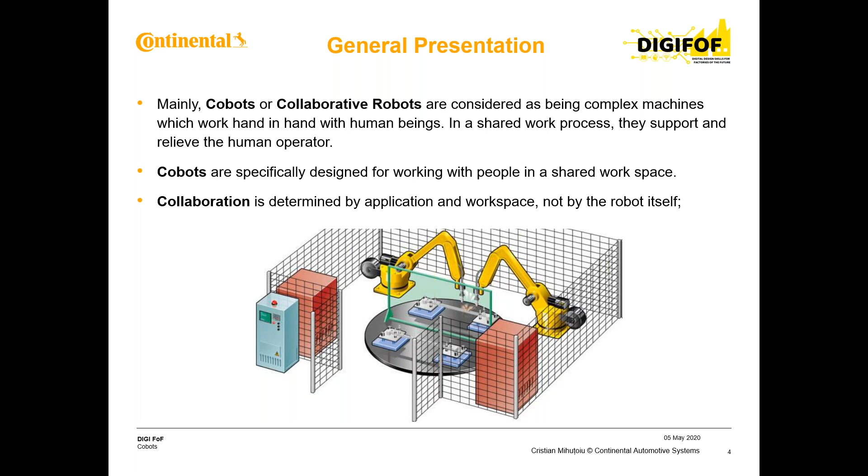Broadly, we have three categories of robots. We have industrial robots, which typically operate in cages because the forces and the dimensions of the material that they manipulate are quite high, quite strong. The robot is a real danger for the operators. That's why we keep the industrial robot in the cage.

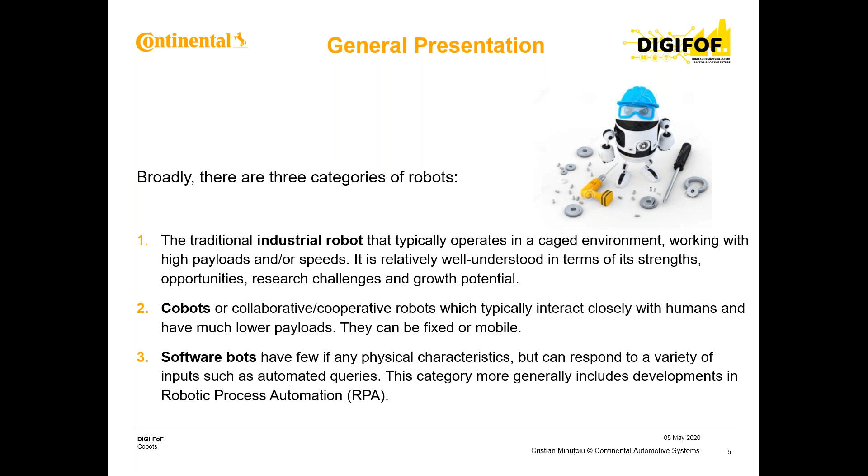Then we have the second category, which is the cobot, or collaborative cooperative robot, which typically interacts closely with humans, with lower payloads, and can be fixed or mobile. And we have the third category, which we do not talk about now, the software bots, applications performing very clearly defined, detailed tasks, like downloading a report from SAP or from ERP systems. We'll not talk today about the software in detail.

When we compare cobots with industrial robots, we identify the strong points of the cobots. The main good point for the cobot is the safety of the interaction. The cobot is designed, built with sensors and the required power, in such a way that the human working with this cobot is not in danger. Another strong point of the cobot is the simplicity of programming.

The programming of a cobot is very intuitive, and sometimes you are able to show the movement. You guide the cobot with your own hand, and the cobot remembers the movement and can duplicate it. So the programming is quite easy. Plug and produce is also a good point for cobots, because you just install it, fix it on the floor, plug it into the power, and then you can start to use it. There are no very strong requirements related to installation.

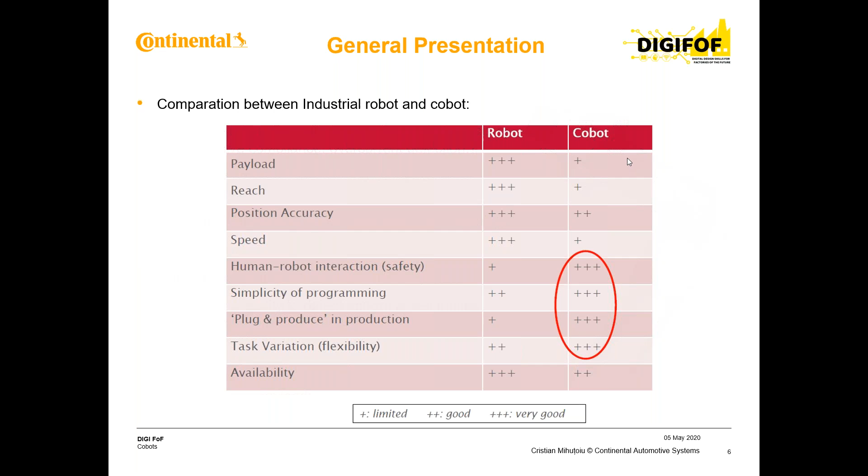The main advantage of cobots, as I said, is safe interaction with humans. This is one of the major advantages of cobots. This advantage comes from integrated sensors, from passive compliance systems built into the cobot, and from overcurrent detection. The cobot is sometimes built with cameras that can identify obstacles and move around them in such a way that it will not cause any harm to the human operator working around it.

Easy programming: as I said previously, it's very easy to make the cobot learn a movement just by guiding the arm with your own hand, and then having the cobot repeat this movement. Flexibility of task is one of the advantages of the cobot. It comes not only from the possibility to change the program, but also from the ease of changing the tool at the end of the robotic arm, which gives the possibility to reuse the robot: take it from one place, move it to a different line, change the tool, and just start to use it.

Here we see some forms of human-robot collaboration, starting with the case where the robot has its own workspace and is put into a cage, so that if you open the door of the cage, the robot is stopped, which is the minimum collaboration, or almost no collaboration. Going through different possibilities to share the workspace, up to complete integration, complete collaboration, where the human and the cobot share the same workspace.

People can give a piece to the cobot or can take the piece from the tool of the cobot. So they are moving in the same space, the same area, and there are enough safety precautions, enough safety elements, that do not allow the cobot to hit, to damage, or to create health problems for the human operator.

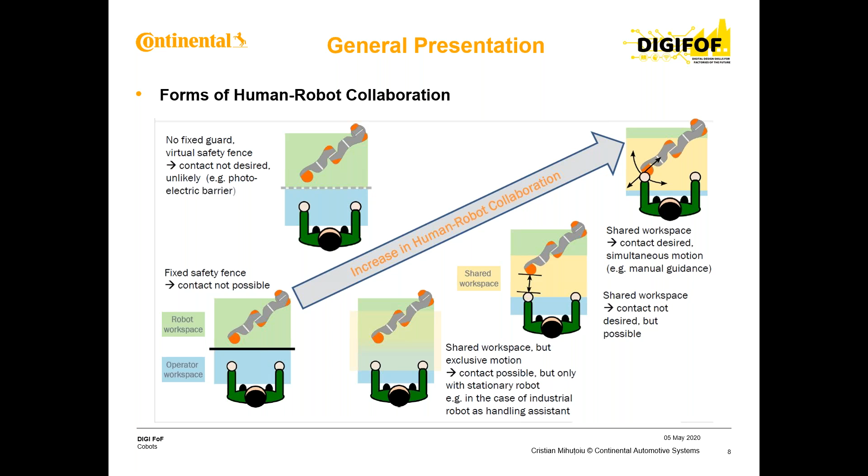In terms of human-robot collaboration, it enables variable automation of tasks for which complete automation is too expensive or too complex. In this way, we can do partial automation using the cobot and leave the other part to the human operator. So in the end, the cost will be more affordable for the company instead of doing a complete, expensive and complex automation.

There is rationalizing tasks by combining strengths, dividing the work optimally between the robot and the human. The idea is that neither of them waits for the other, wasting time. Non-ergonomic workstations can be improved by cobots. This is a very strong point in terms of implementing the cobot.

We remember that in the industrial environment, there are a lot of posts where the operator must do the same task, pick and place, with very high repeatability. We sometimes have machines in our plant that operate with a cycle time below 30 seconds, even below 20 seconds. So in 1 minute, the operator must manipulate a piece 3 times in the same way. For fatigue, for the impact on the health of the operator, this is very dangerous. So in this case, using a cobot there will improve the productivity of the line and will release the operator from these repetitive tasks.

Common applications. There are several common applications. This list is not complete. Definitely there are possible other applications, but there are some of them which are really common.

Pick and place is one of the most frequent applications for the cobots. The cobot just takes the piece from one part, from one end of an equipment, from a conveyor, from a box, and puts it in a different place. You can put it in a fixed position on a device, on a tool, on a second line or a second equipment. Always the cobot picks the piece from the same place and places it in the same position. So the positions of picking and placing are quite fixed and standard.

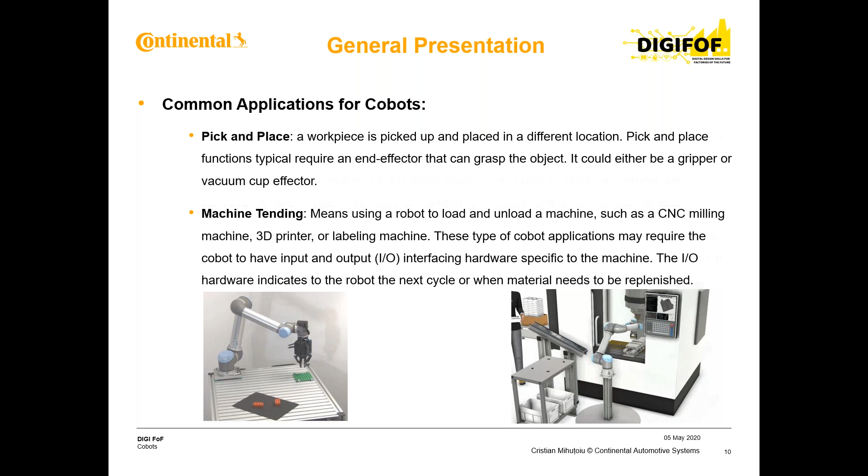Machine tending. Here we talk about the cobot loading and unloading a machine, or an application. It's loading a CNC milling machine, loading a 3D printer, or something like this. This type of cobot application may require an input-output interfacing hardware with the specific machine. So when the machine delivers the part in the specified position, it's calling the cobot to take the piece or to supply the piece for it. This way the machine, the CNC, calls the cobot when it's needed.

Another application is packaging and palletizing. It's a specific application of pick and place. And why is this specific? Because if you remember, when you put boxes on a pallet, usually there are more positions there. So the cobot must iterate the position. If we have 5 boxes to be placed on the pallet, he must put the 5 in the same layout as is in the programming. So he must put the first box, then the second box near the first, the third box near the second one. So in this case, he needs to iterate.

It's the same on packaging. When you have, like, a box with beer bottles, you need to put row by row of beers into the box in such a way that the cobot does not try to put bottles on the same row already filled with bottles and create accidents.

Another common application, we can see it frequently in the automotive industry, is the process task. When the cobot has at the end, as an effector, a hose to deliver some glue or to deliver some silicone, or, if you remember from the automotive industry, robots or cobots using welding devices at the end of the robotic arm. So they just need to follow a specific track, a specific trajectory, with the end effector in such a way to perform that task, to deliver a specific quantity of glue or silicone, or to allow the parts to be welded together. In this case, we have this process task.

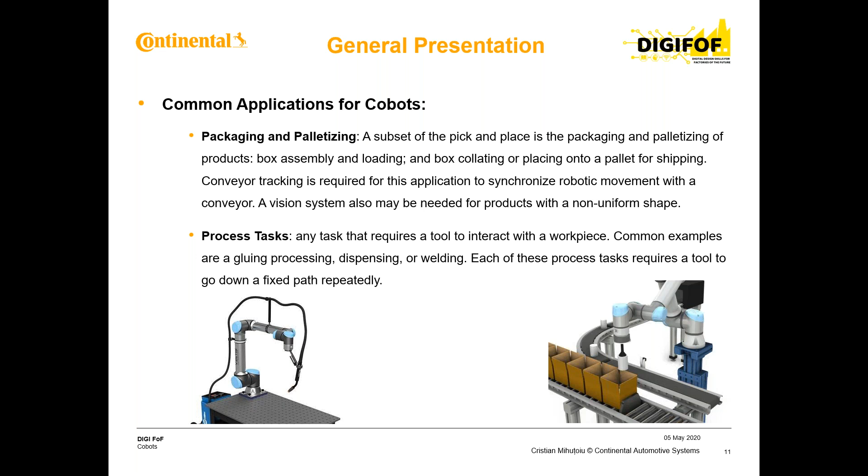Another application that we see sometimes is the finishing task. The cobot uses a brush and he needs to put some pressure in order to clean or to polish some surfaces, to eliminate the dust or to improve the shine of the surfaces. In this case, the cobot needs to be supplied with force sensing, or he needs some cameras in order to identify which are the areas where he needs to do this movement of polishing, or to identify areas with scratches to remove those scratches by polishing, or things like this.

Another application that we have for cobots is quality inspection. It's one not so frequent, where at the end of the robotic arm you put a sensor or a device measuring something or doing some verifications. These end effectors are supplied with high camera resolution, with sensors, all these elements in order for the cobot to be able to do the inspection. The cobot moves the camera around or close to a surface in order to identify scratches, or the cobot moves, let's say, a sensor that can identify if there are holes or defects on a certain surface of a piece or something like this.

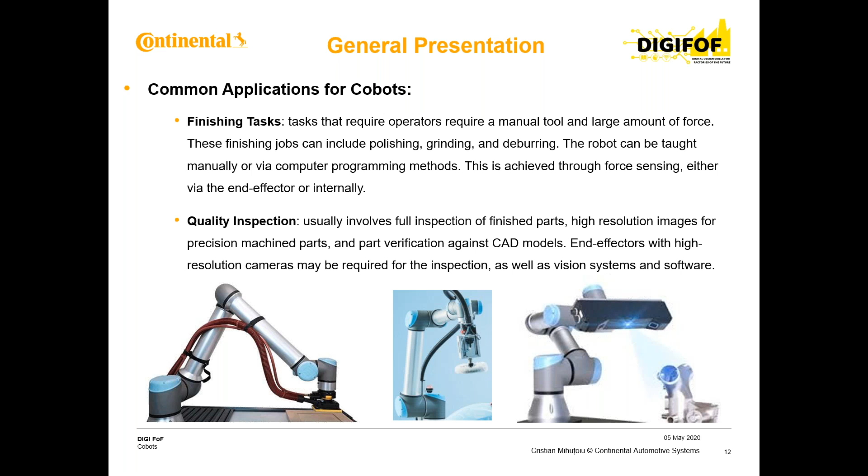Now let's talk about cobot selection. There are some definitions that we need to see before going to the next steps. Payload: here we talk about the weight that the robot can carry, and the real payload is the nominal payload without the payload of the effector or the gripper. So when you plan that the robot needs to manipulate 1 kilogram, you must remember also that the gripper has its own weight, its own mass. So altogether, these two, the gripper and the load, must be within the nominal admitted mass or restriction of the cobot.

Reach is the distance that the robot can achieve. Usually the cobot does not need to be forced to the maximum of the reach, because in this case there are some risks that are introduced. This measurement is taken from the robot base until the maximum distance that the effector can reach.

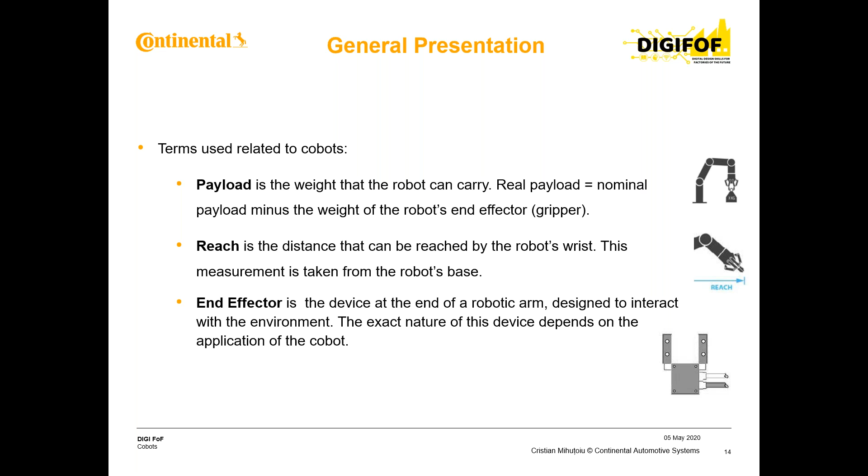The end effector, which usually we call the gripper, is the tool which is mounted at the end of the robotic arm in such a way to allow the cobot to perform the task for which we install it there. The exact nature of the device depends very much on the application where we need to use the cobot, and also depends on the cobot itself.

In terms of Cobot selection, in Continental Sibiu and also in Continental worldwide, Universal Robots is the standard supplier for Cobots. An evaluation of different Cobot suppliers was made at corporate level, and the decision was taken to use Universal Robots as a standard application for our plants.

Degree of freedom is also a very important selection rule. Depending on the complexity of the Cobot movement or other restrictions faced on the shop floor, an increased number of degrees of freedom may be required.

Speed is also very important, because based on the speed the Cobot is able to perform, in a specific cycle time, the movement and the task it must perform. If the speed is not adequate, the Cobot will become a bottleneck for the line, and the productivity and output of the line will decrease. Safety is one of the major elements.

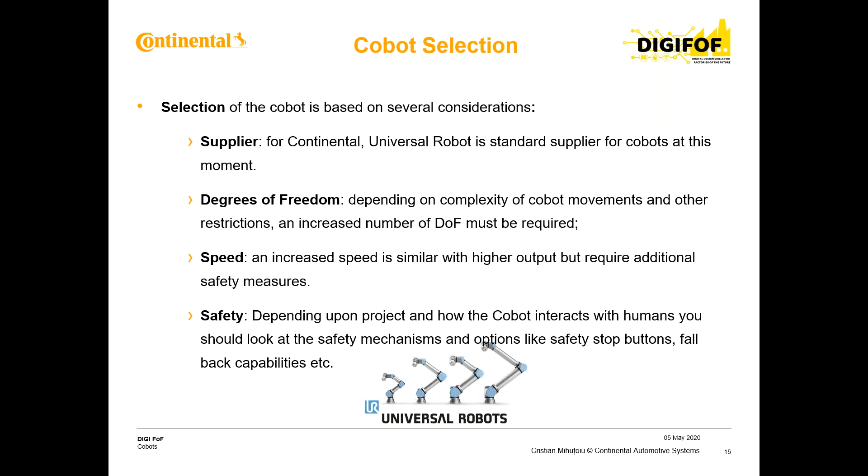There will be no incident in the collaboration between human and Cobot. Here we have a description of a Cobot UR5 from Universal Robots. It's the most frequent Cobot in our CBU plants, because based on all these requirements, we decided to use this Cobot for most of the tasks that we wish to transfer from the human operator to the Cobot.

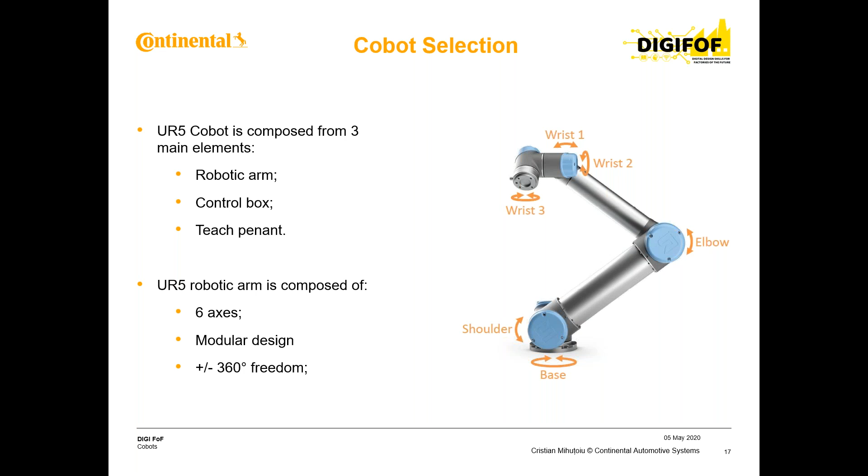Now, let's see what this UR5 Cobot is made of. We have three elements: the robotic arm, control box, and teach pendant. The robotic arm is able to move on 6 axes. It has a modular design, so some elements can be transferred from one to the other, and it has 360 degrees of freedom, so it can perform a complete rotation for all its elbow and wrists.

The control box contains the flash card, the USB with software. The control box also supplies power to the robotic arm and contains the safety systems and all the communication devices. As connectors, we have the power connection. As you can see, the Cobot does not require special power sources. It needs the connection with Ethernet, USB, and also the connection to the robotic arm.

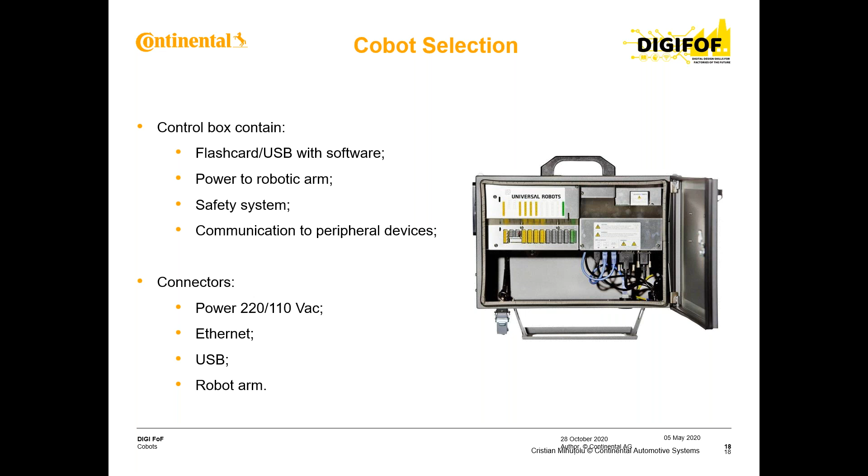The teach pendant, or touchscreen monitor, contains the power button, emergency button, free drive, and USB connector. We'll come later to talk about these elements. By pressing the power button on the front of the panel, the control box will be turned on. When the control box is started, text will appear on the touch screen. After about 1 minute, you will see that the touch screen is activated and you can use it.

We have an emergency button, very important, because pushing it will immediately stop the motion of the robot. All movement will be stopped and all the brakes will be activated. Emergency stop shall not be used as a risk reduction measure; it must be only a secondary protective device. So you cannot use this emergency button as one of the main methods to prevent collision between the human operator and the Cobot.

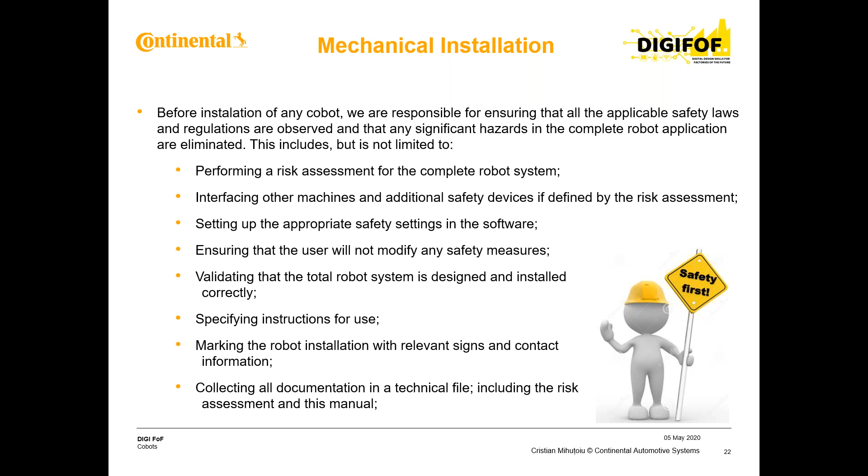The robot must be supplied and marked with all relevant warnings, relevant details, marks or highlights. All the documentation, as I said, must be included in a technical file, including the risk assessment. All this information must be available in the area where the robot is working, otherwise it is useless. If the operator needs to check something, he needs to have this folder, this file available.

When we talk about mechanical installation, there are two areas that need to be taken into consideration. One of them is at the maximum of the reach of the cobot, where even if the cobot makes a movement with a low speed, due to this range, it is able to hit the operator or any other obstacles that it finds in the area, so it can create a risk.

So that's why it matters when the area where the robot must work is longer than 450 millimeters. In the case of this cobot, we talk about the UR5. So when the cobot is going to this distance, 450 millimeters from the base, there is a risk of stretching out or punching the operator, or destroying the obstacles that the cobot will reach.

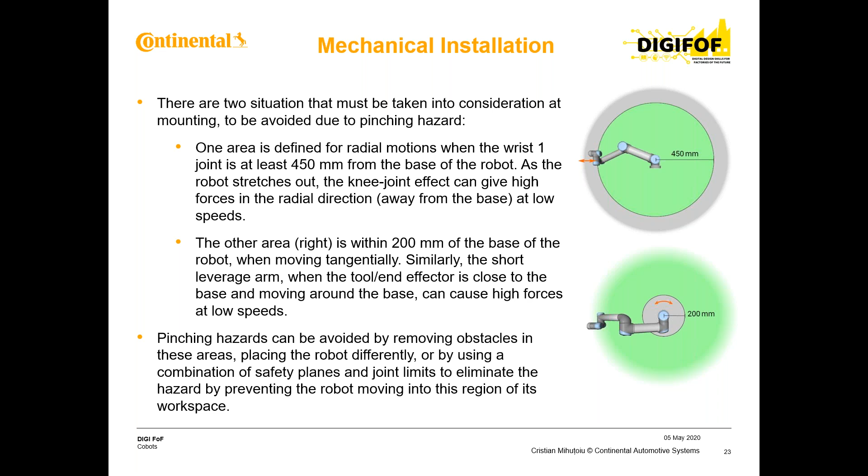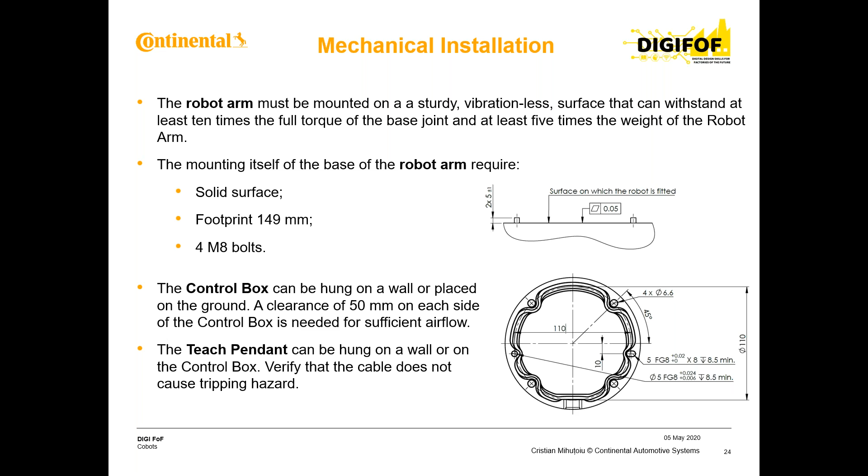We have also some details about how to fix the robot onto the base. The robot can be fixed on the base, on the floor, or can be on a support in order to make it operate at a higher distance from the floor.

There are also some possibilities for some specific applications to dramatically increase the reach of the robot by adding linear axes, vertical and horizontal, that can enhance the radius of action many times. But in this case, as I said, we need to take care about the obstacles. We need to have a more detailed risk analysis in order to avoid obstacles, in order to avoid accidents.

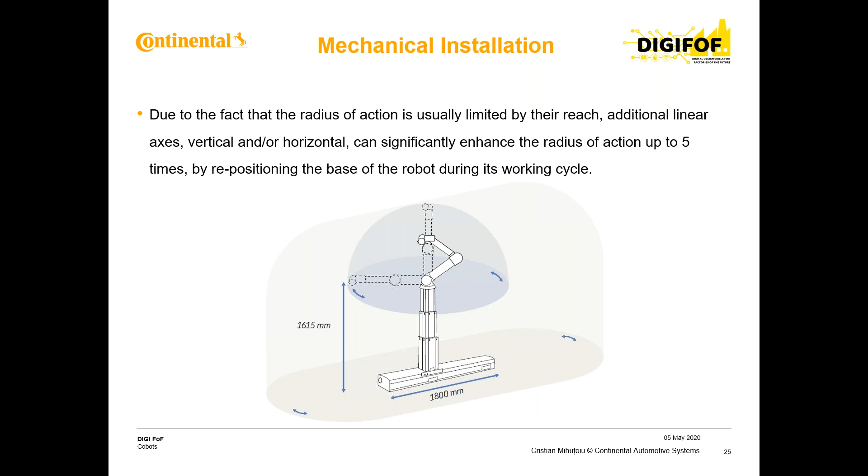In terms of gripper development, there are not too many things to say. The most frequent gripper that we have in our plant, and that I have seen until now, is the gripper with fingers, between 2 to 5 fingers, for pick and place. Because pick and place is one of the most frequent applications, the gripper for pick and place is also the most frequent. We have also suction cups. We don't use them in Continental Sibiu, but they exist and can be used with very good results.

And there are also two grippers, let's say more specific for the application: magnetic, when you need to manipulate some parts made from iron, or electrostatic, when you need to manipulate some, let's say, plastic parts or small parts that can be manipulated using this electrostatic effect. But these two, magnetic and electrostatic, are quite low frequency kinds of grippers.

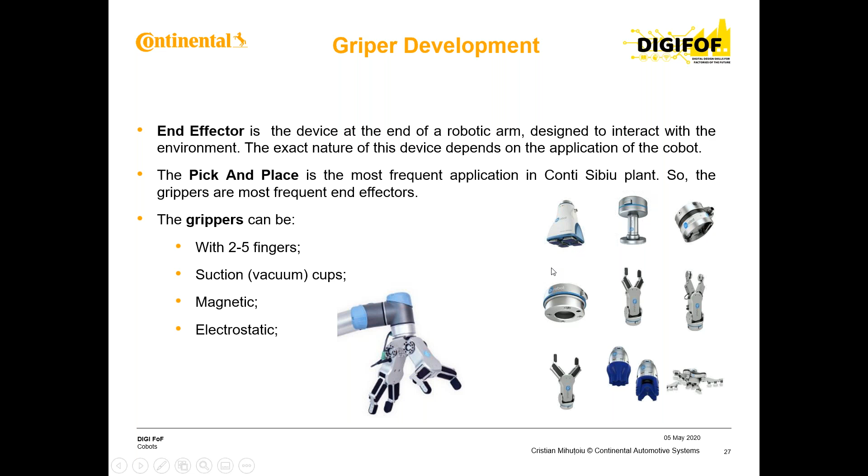Anyway, we have a lot of possibilities to choose. There are companies that design specific grippers for each application in such a way that they maximize the productivity of the cobot, maximize the tasks that it is able to perform, and completely avoid damaging the parts that the cobot manipulates. So the gripper is designed based on these two considerations: maximum productivity, which comes from the easiness of picking and placing the part, and not damaging the part during the pick and place and moving of the part.

In terms of electrical installations, we have also some safety considerations. Before any electrical works, we are responsible for ensuring that all applicable safety laws and regulations are taken into consideration, and any significant hazards in the complete robot application are eliminated. So when we talk about the risk, we must take into consideration all the elements, not only the robotic arm or only the electrical box. We need to consider the system of these three components, also integrated with the machines and equipment where the robot is working.

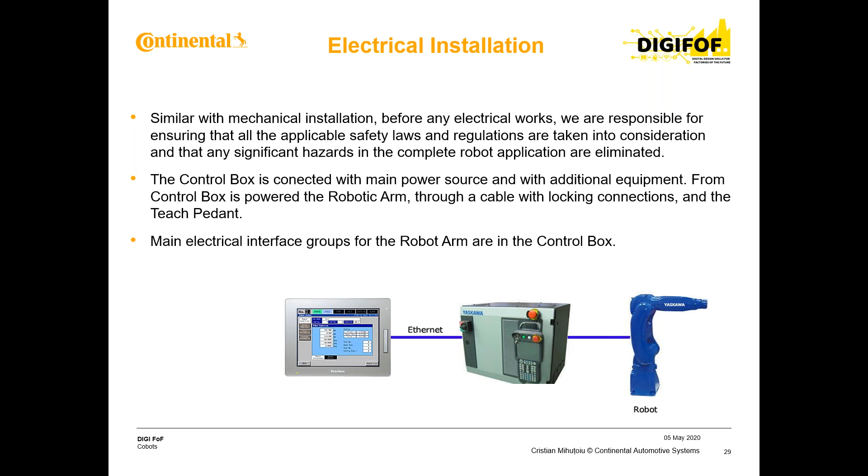The control box is the one which is connected with the main power source, and from the control box there are connections to the touch screen and to the robotic arm. The main electrical interfaces you can find in the control box.

What we can find in this control box: also connection to the ground, which is really important, because due to this movement, these manipulations, sometimes electric charges can appear, or some desisolation of the wires can appear. So it's very important to have a connection to the ground.

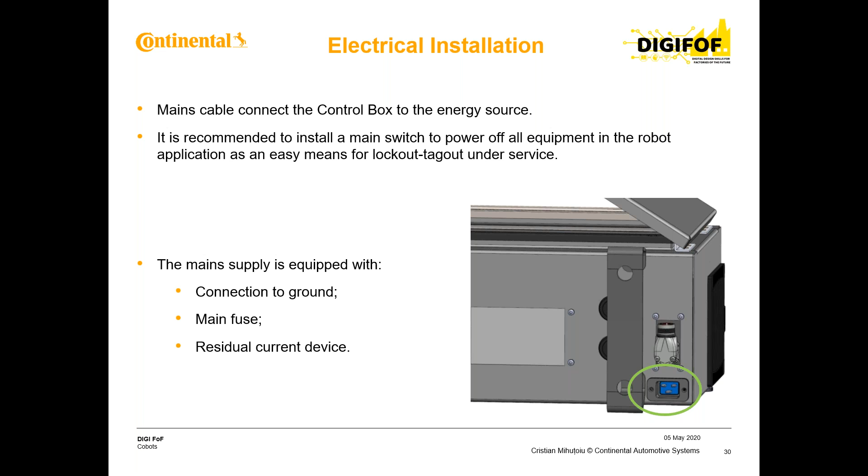We can find on the electrical box the main fuse and connections, as I said, with the other two components of the cobot. Also, on the control box must be installed devices for LOTO. We talk here about the devices for lockout, tagout, in such a way that if an operator or somebody, a maintenance guy, comes to make some modifications, then he will completely stop the robot, and nobody else is able to restart the robot in an accidental way.

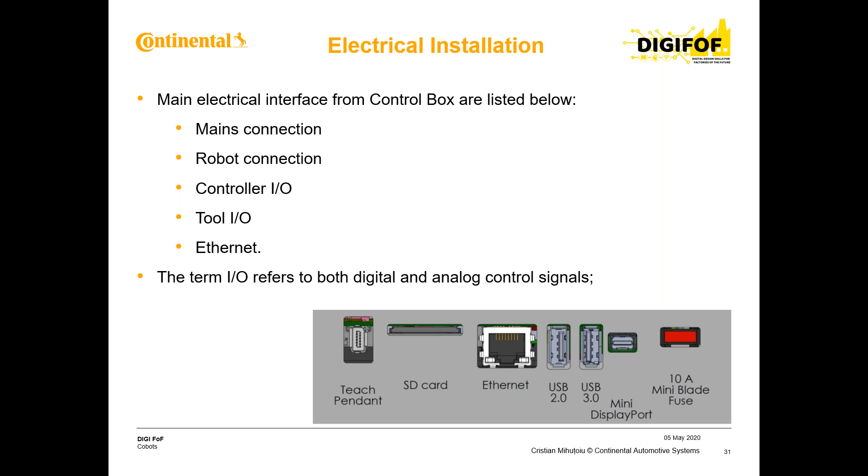You can also find here some other connections: main connections, robot connection, controller, tool, Ethernet connections, depending mainly on the application that will be used, or how complex is the cobot, and complexity is coming from the application also. We'll find also a lot of possibility to connect the cobot with other devices.

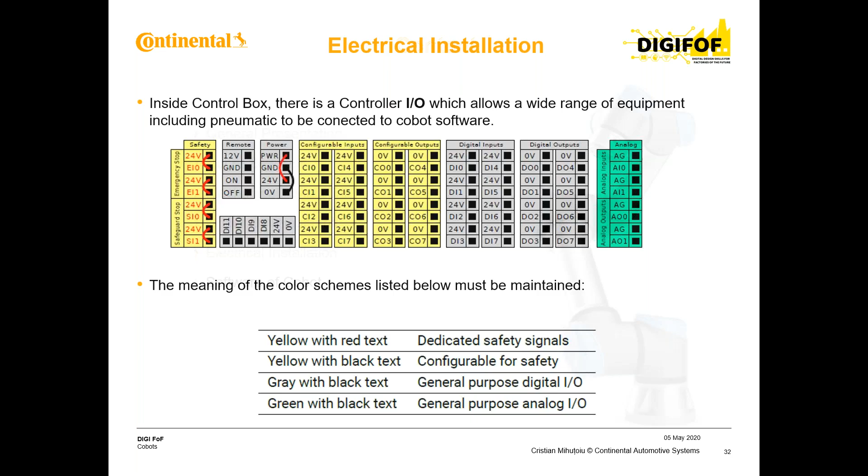We talked earlier when we said about the applications that sometimes the cobot needs other devices like cameras, like force detections, or when you put at the end of the robotic arm a gripper that needs to have some power supply or needs some control. All these elements are, let's say, connected also inside the control box and allow us to design the application that we need for our plant, for our shop floor.

Related to software, Universal Robots use PolyScope. This is the name of the program that you'll find on the touchscreen, an interface based on Linux, and it's the property of the Universal Robots company. They develop it, they keep it updated, and it's, let's say, with copyright. And what I can say is that it's very easy to use this interface. It's very intuitive.

Related to the manipulation or using of the robot, there are several modes that the robot can be in. We have, first of all, the normal mode. The cobot is doing its task. Effectively, it's running in a protective mode with safety limitation, and it's realizing the task in the design cycle time with the designed specification. Most of the time the robot is operating in this normal mode.

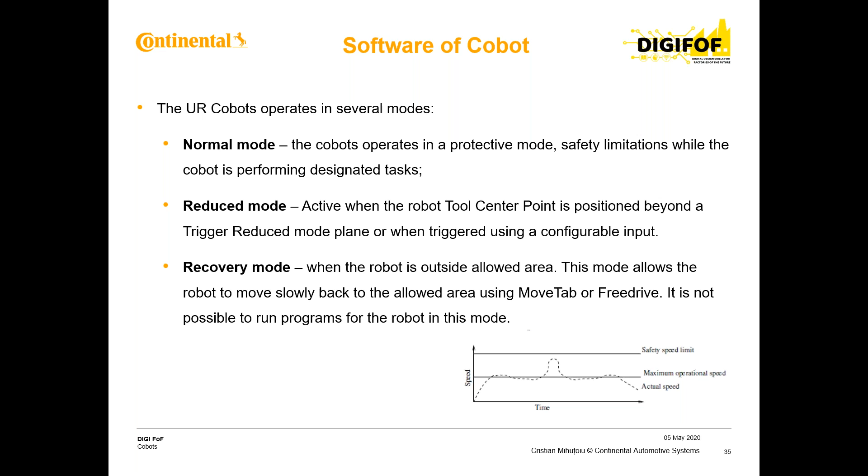We have also free drive mode. When the cobot is in free drive mode and the movement goes to the limit that we talked about earlier, the user will feel a repelling force. So the cobot starts to oppose, to try not to go outside of the area which is allowed for it. The user will feel this force growing higher closer to the limit position. But despite this, if you really force it, push it, the robot arm will go outside the allowed area. This is more as a warning.

So when you design the movements of the cobot, and there is a certain plane, because outside that plane there are from time to time obstacles, and you try to program it to make some movements in that area, the robot will give you feedback that it is not allowed to operate in that area.

Backdrive mode can be used to move specific joints to a desired position without releasing the brakes. When we want to teach him some movements, some applications, sometimes we need to put the robotic arm into a very tight position. So in that case, we need a more precise movement. So we just keep the brakes of the robot closed. So we move him slower, but with higher precision. This is why we have this backdrive mode.